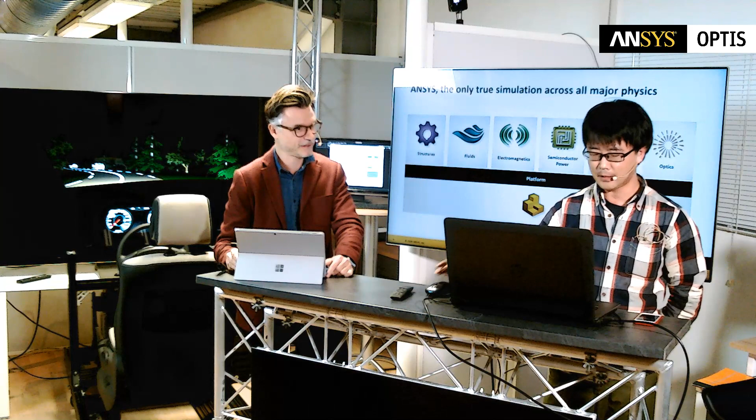So today, smart headlamp. First, Shohei, what is a smart headlamp? The smart headlamp is the adaptive driving beam, but at the same time, it has the sensors inside, LiDAR sensor, camera sensors. This is what we call smart headlamp. Okay, and this is the trend. Yeah, it's a coming trend. Okay, so I think this is the introduction of your next slide. Yep, the technology trend.

So today's technology trend is having more and more sensors for ADAS technologies and the future autonomous vehicle. And for the lighting, the ADB, adaptive driving beam, the technology trend is matrix beam or pixel lighting, or some may call digital lighting. The idea of a smart headlamp is having them together, having LiDAR sensor, camera sensor inside the headlamp. So the headlamp will be an all-in-one product, and for the headlamp suppliers, that will be additional value.

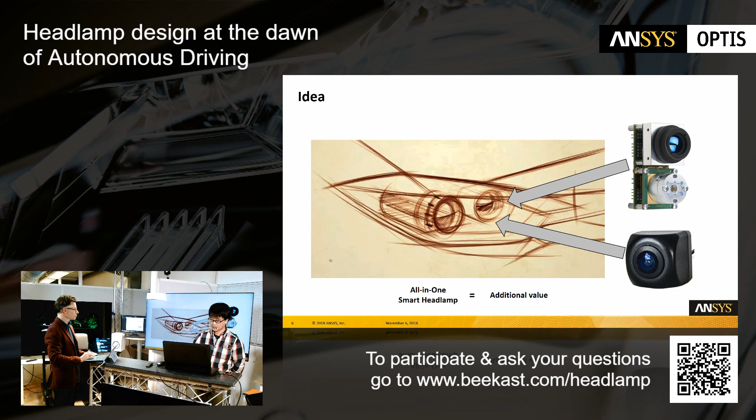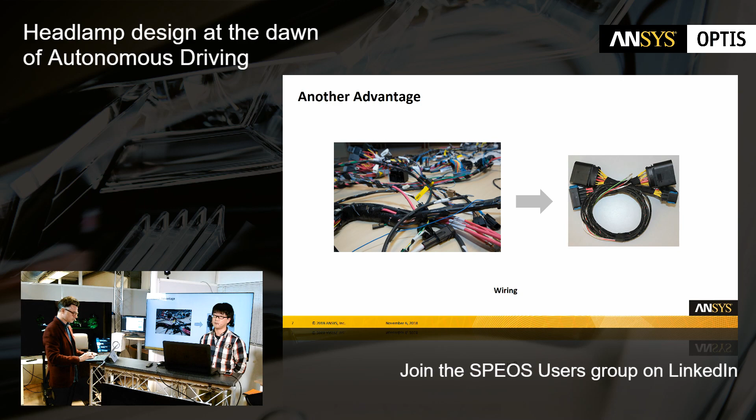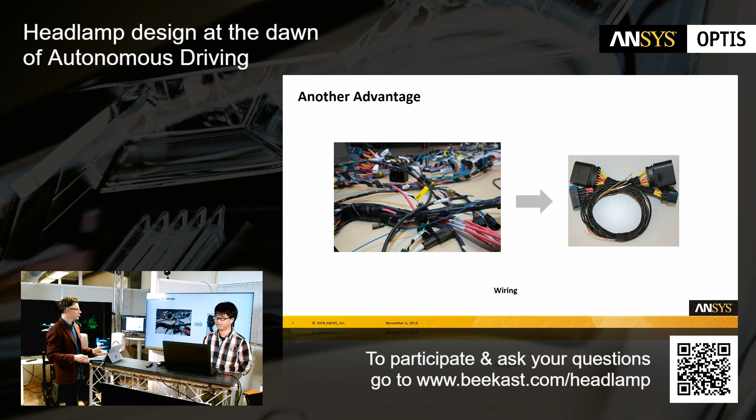And another advantage is to simplify the wiring. Currently, headlamp and sensors are separated, so the wiring harness is going to different places. But if everything is integrated inside the headlamp, there is only one connection to the lamp, so the wiring will be simpler. So the benefit of integrating sensors is first to simplify the wiring harness. That's for the OEM, the car maker. Yes. And for the supplier, it's to add value to the lamp.

Okay, I think it's time to have your feedback from the poll in Beekast. So how many projects do you have for 2018 and 2019? For this year, between 1 and 3 for 40% of you. And for the coming year, 2019, between 1 and 3 and more than 3. Yeah, the number of projects is increasing, the coming year is going to be busy. So that means everybody has a project next year.

Well, from now on, let me introduce what can be possible thanks to our solution. So first, I'm going to demonstrate one of our products, SPEOS, regarding the lighting design, sensor specification and sensor layout. And after that, I will switch to another product, VR Experience, to explain the virtual lighting evaluation. So let's begin with SPEOS.

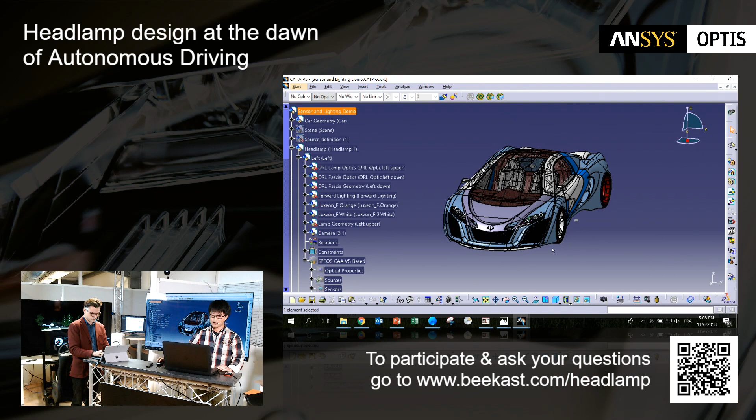Here I've got a car, and here is the headlamp. As you can see, this is not the same as the conventional headlamp. Here I have the lighting module, forward lighting, LiDAR sensor, and camera sensor here. And the lighting signature here: this is a daytime running lamp and turn indicator at the same time. Okay, so let's begin with lighting design.

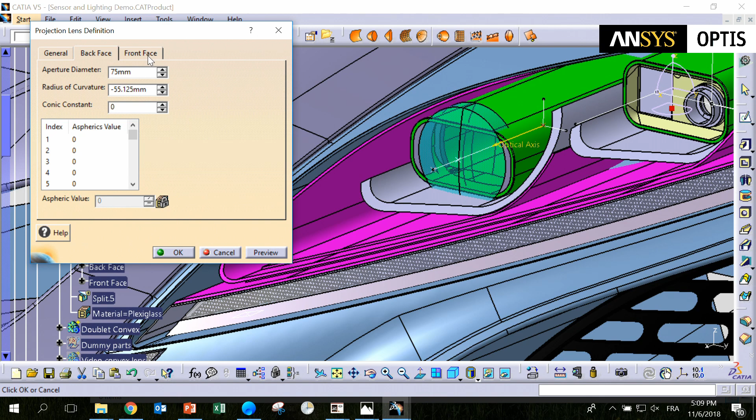For example, this lens is made with this feature developed by OPTIS. The name of this module is OPD, optical part design. Here you can see several icons to create the complex optical geometry. Let's see the interface. For example, this one is projection lens. The definition is your focal point, optical axis, focal length, and some other geometric parameters. Then the geometry is automatically created. It's quite simple and fast.

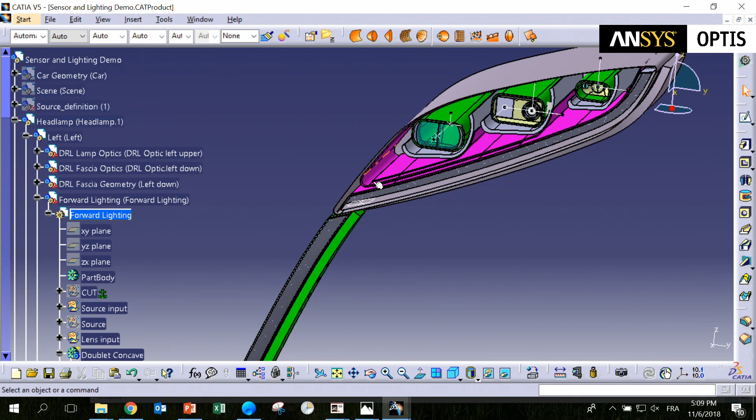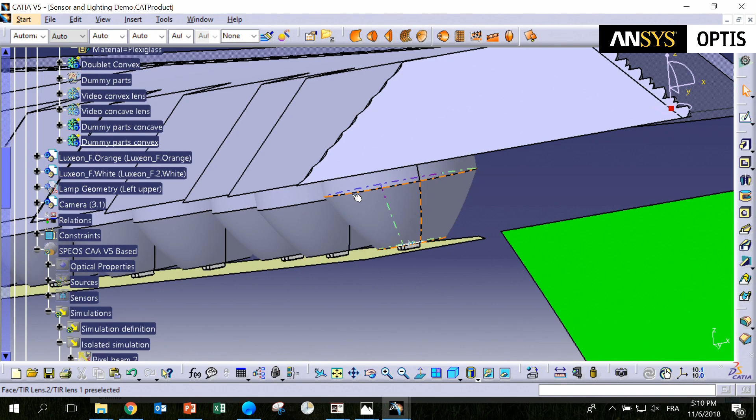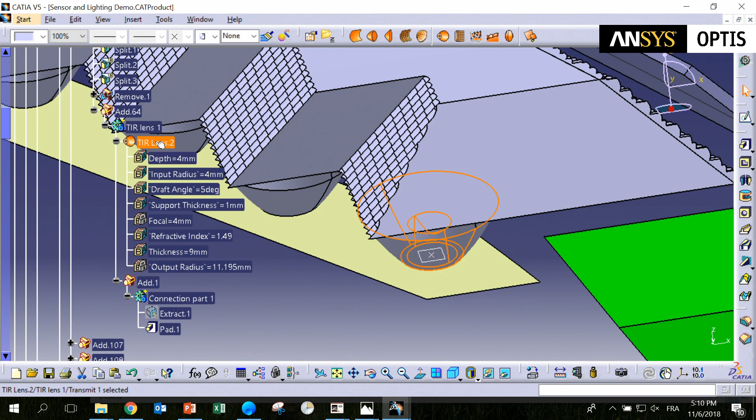Another example is this lighting signature. Let's hide the car geometry and some other geometry. As you can see, this lighting signature, some may call it a light blade, is made with a light inlet, a reflection on the back, and an output face here. And as I showed for the projection lens, a similar interface is available for every feature. For example, this one is a light inlet, with several geometric parameters. Then the geometry is automatically created like this.

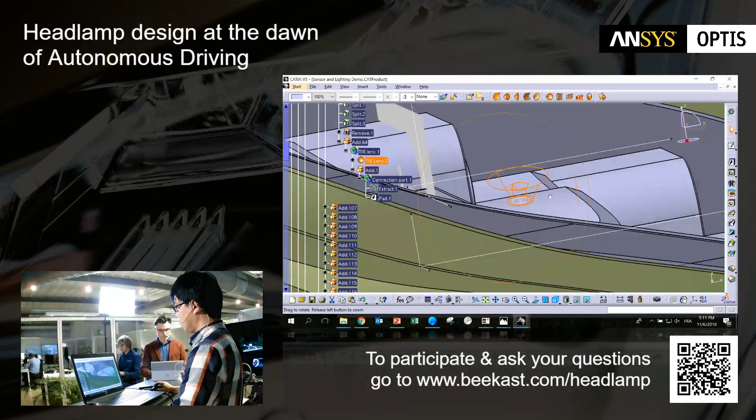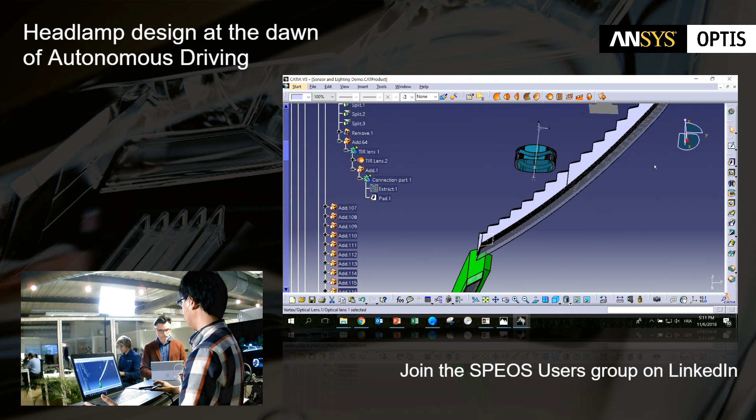And this back face and this front output face as well. And imagine that if you have to create these kinds of small prisms, hundreds of prisms along the styling manually, it takes hours or a day or even days. But thanks to Speos OPD, it can be finished in minutes. So you can make several iterations using different parameters to investigate the performance, appearance.

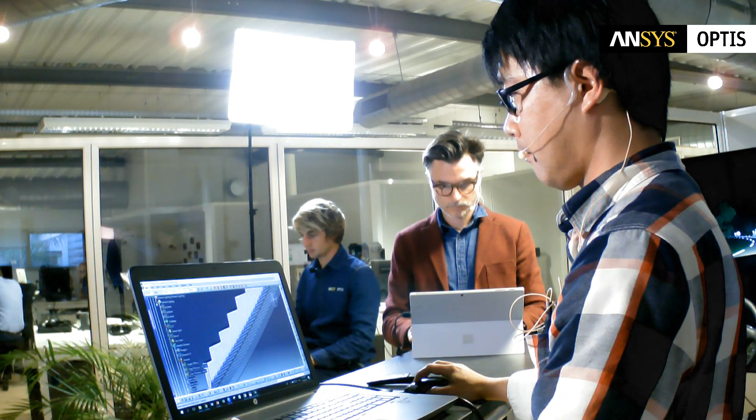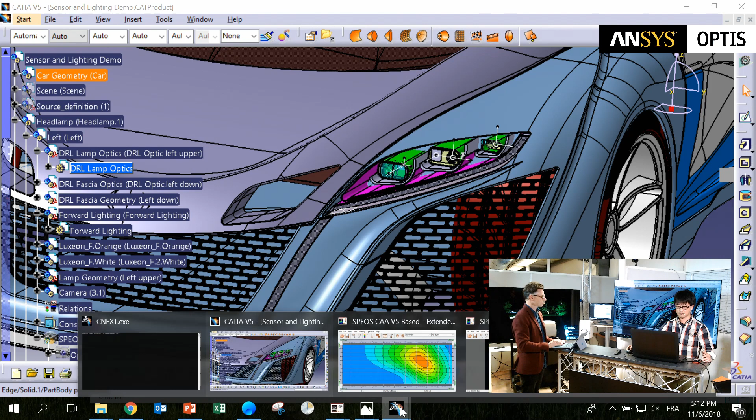I said performance or appearance. Of course, you can evaluate these kinds of things in Speos. For example, regulation. This is the beam pattern from this lighting signature. And this is a part of a classic optical simulation.

And of course, you have to check the appearance, how it looks like with your design. So we have the physics-based rendering. This is one of our strong points.

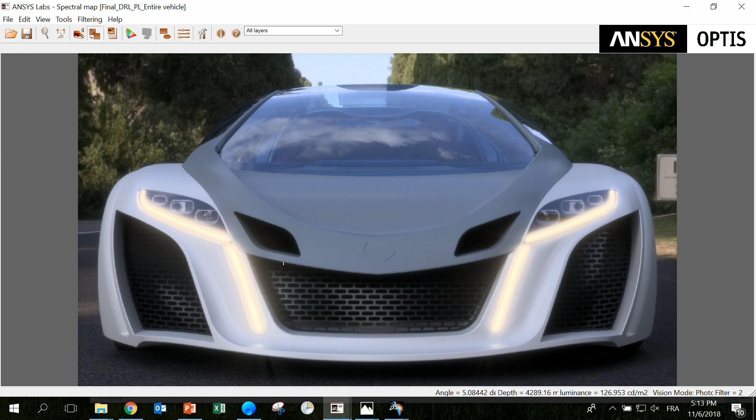Yeah. Before we continue, Shoei, as we have a question dedicated to this part, I just want to close the question we had right before regarding the challenges. So the challenges for you, a lot of physical prototypes. Yes, a lot of physical prototypes, but we also have regulation, test certification, time to market as well.

Great. So that's regulations. That's interesting because you have just demonstrated that we are able to check the regulation in virtual. So it's numerical certification of the headlamp, the performance of the headlamp in virtual. So we are able to deal with these challenges.

I wanted just to jump to the next question while Shoei is showing the images, the rendering of the light appearance, the light signature. So the next question is: are you satisfied with the lighting appearance of the result displayed by your actual software?

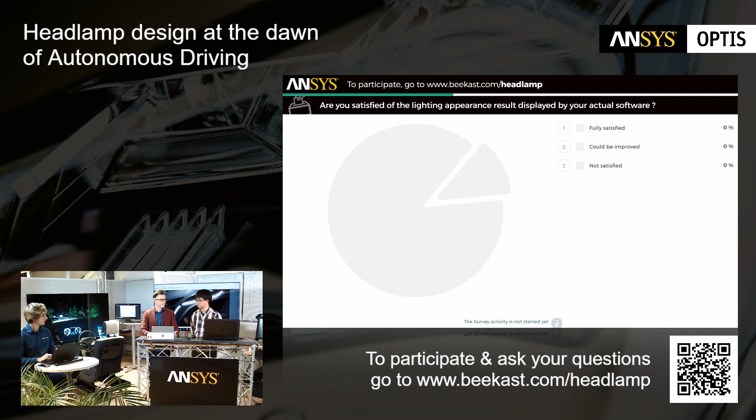Okay. So this is another rendering image in the dark condition, daytime running lamp or position lamp. Or turn indicator. And depending on your needs, you can change the point of view, viewing direction, and run another simulation to check the appearance from a different point of view. Okay. So this is the quick introduction about the lighting design and evaluation.

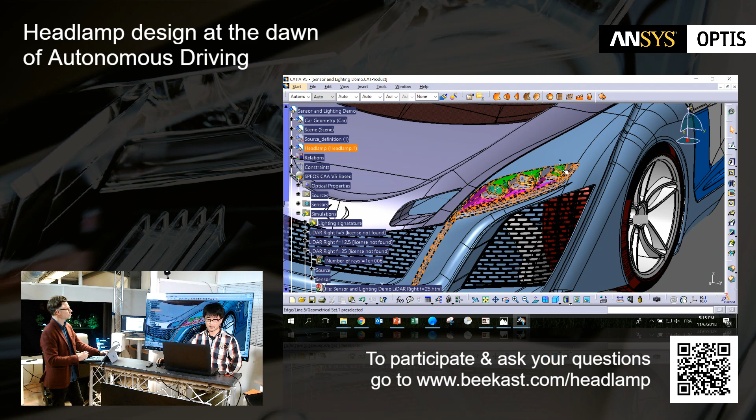So let's switch to the sensors. So before starting, let's see the scene used in the simulation. This is something we just made up, having several vehicles and pedestrians. It's quite a simple environment. This is simply made in CAD, so you can create whatever you want inside the CAD, and you can consider it in your simulation.

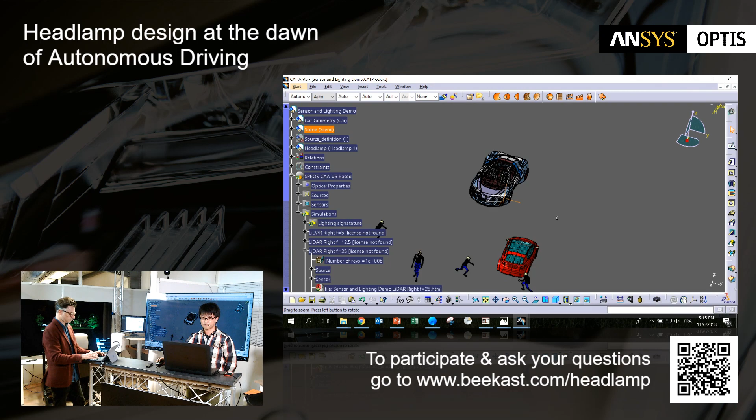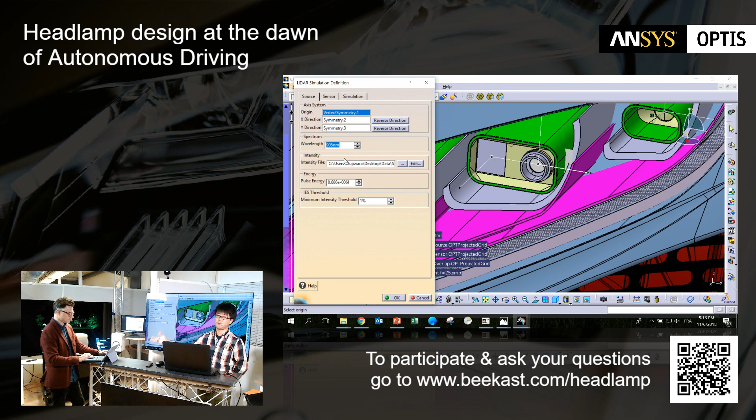So let's begin with LiDAR. As I told you, here I have a LiDAR module. And in Speos, we have developed the function to simulate LiDAR. This is a LiDAR simulation module. And this is the interface of our LiDAR simulation tool. You can define the source here. You simply define the axis system and spectrum and intensity, beam intensity pattern.

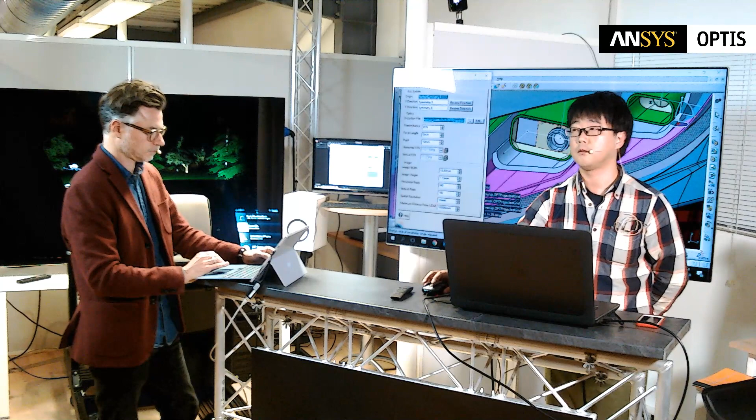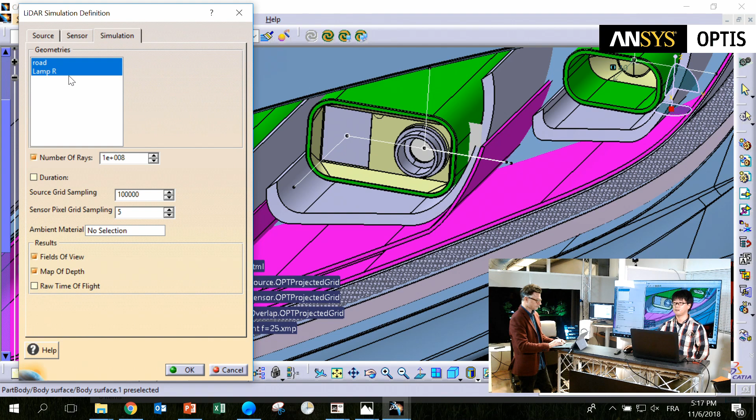And for the receiver, the axis system and some optical information like distortion and image dimension. And you can define the simulation using a defined source, sensor, and user-defined geometries around. So that means you can consider the bezel, for example, this one, and also the objects in the scene, like pedestrians or other vehicles.

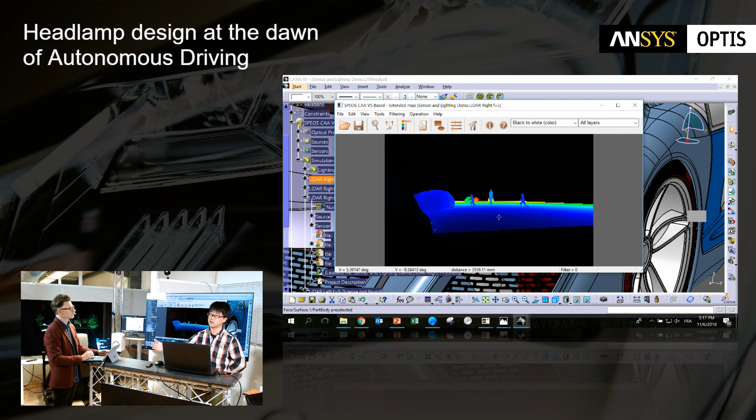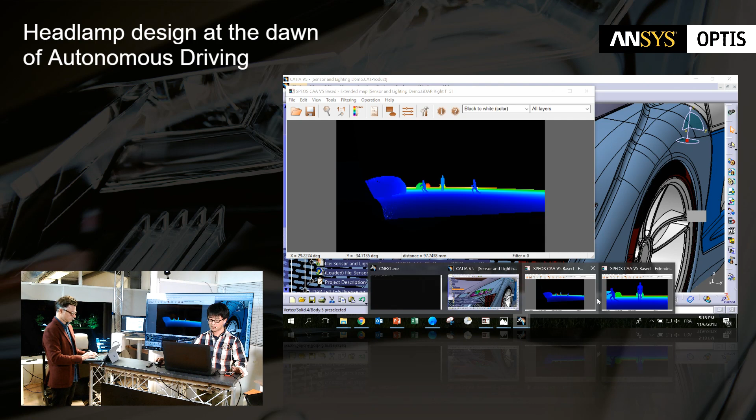So this one is a simulation result with a shorter focal length. And this one is a simulation result with a longer focal length. So you can check how much this LiDAR module can detect, how wide.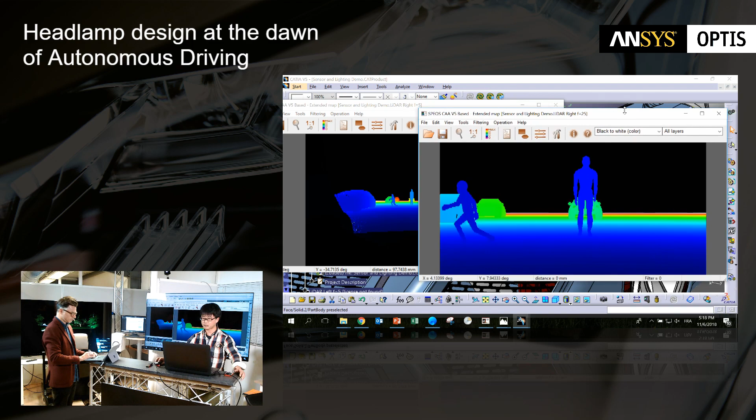So to test a different configuration, just define several different LiDAR simulations, simply changing some parameter here, for example, the focal length. If you want to change the image dimension, you can modify it here, or resolution. So you can test a lot of different configurations of your LiDAR module in virtual. Okay.

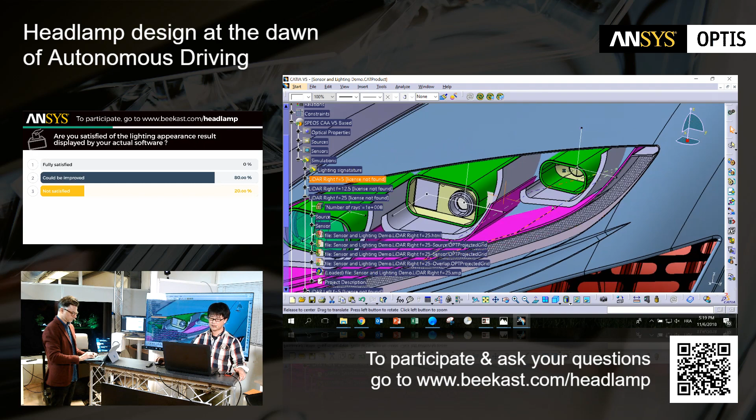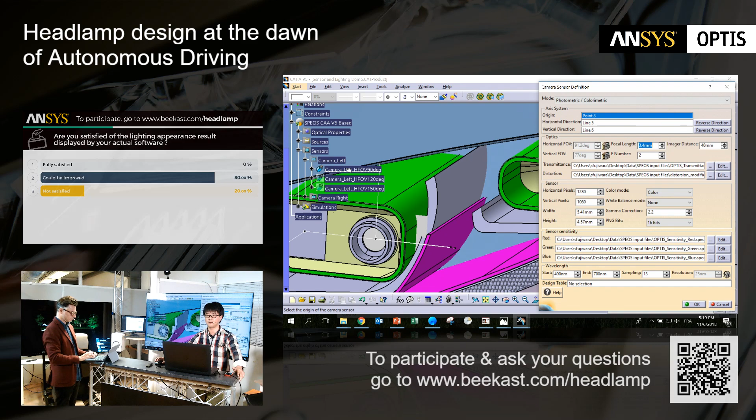So next, let's see the camera. We have the camera sensor inside Speos. The definition is quite similar to the LiDAR receiver. This is the interface. So the position and direction, axis system of the camera, and optical information: transmittance, distortion, and sensor dimension.

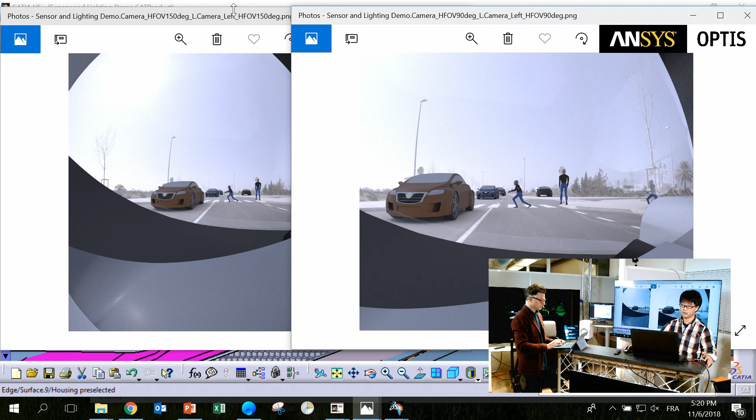So you can use this camera sensor in your simulation, considering the geometries around. So you can do a similar thing as a simulation, for example, with a different field of view. Obviously, these two images are different. The right one has a narrower field of view, and the left one is wider.

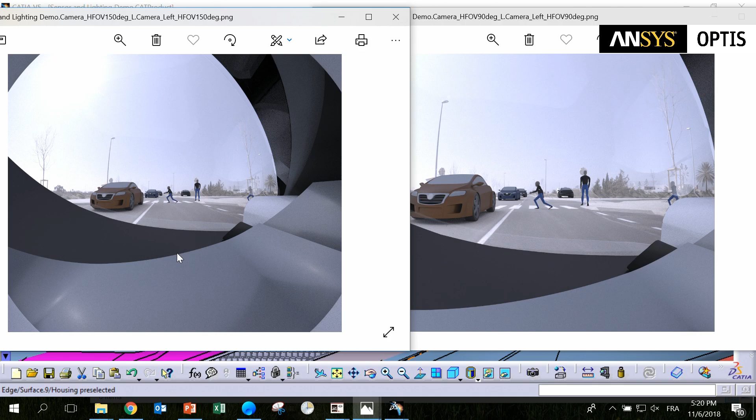But let's say you want to have wider images with this camera. If you put the camera with a wider field of view inside the headlamp, you have a lot of objects inside the headlamp bezel. Most of the image is blocked by the bezel. So thanks to this simulation result, having a wider field of view camera is not a good idea, I think. So you can do this kind of test quite quickly.

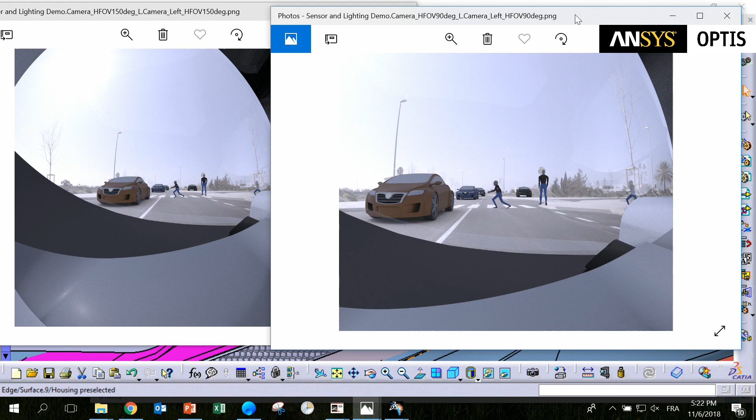Another interesting point is the reflection on the outer lens of the headlamp. Here I have some reflection here, and here too. Sometimes, for some reasons, you may have a different option of outer lens shape. The outer lens shape is part of the class A surface coming from the design studio. So the design studio may have different styling ideas, and from the engineering side, for some reason, the shape of the outer lens may have to change. So for every possibility, you can check the effect of the outer lens. For example, in this model, I have two different outer lenses.

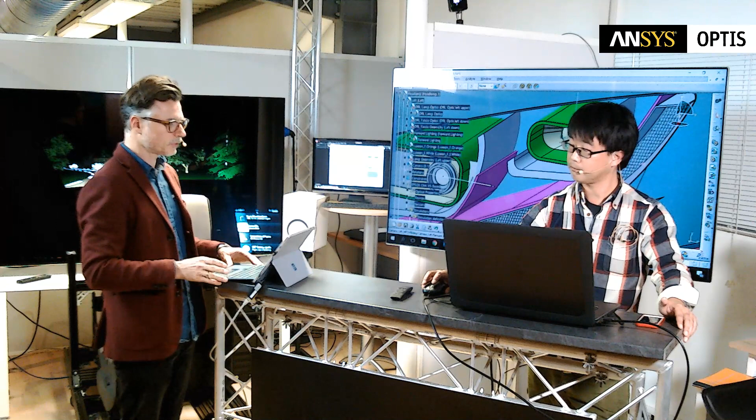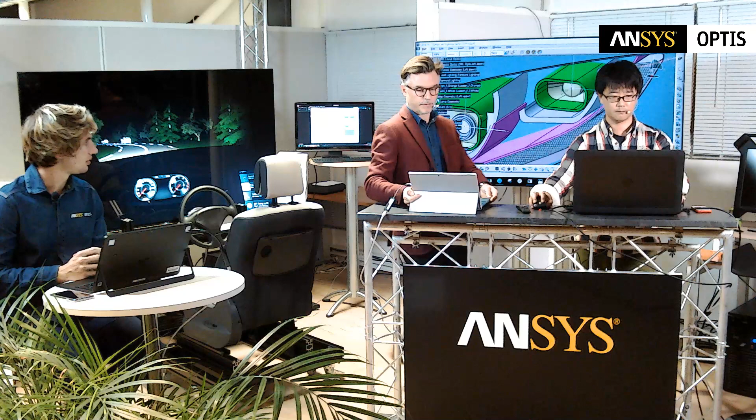Maybe just before you continue, we can review the last question: are you satisfied with the lighting appearance result displayed by your actual software? I think it's important to notice that people are not satisfied, and they need an improvement regarding the images. 80% of you say that it could be improved, and 20% are not satisfied.

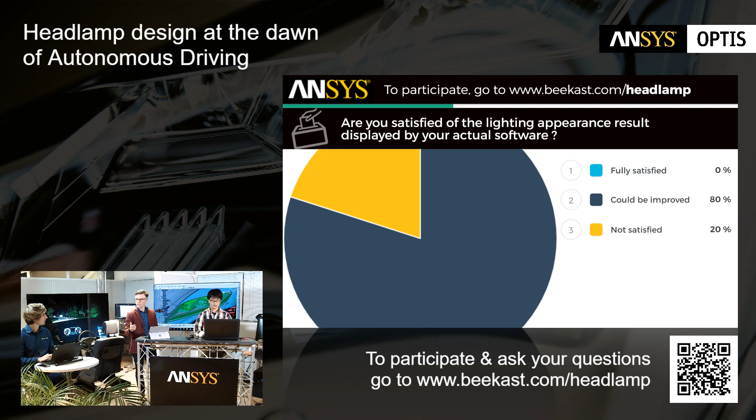And it's something that is key in our software: with the human vision module, you are able to experience the light appearance of the light signature, the daytime running light, like in reality. So that's really important, and this is one of our strong points. We will launch the next question and continue with the explanation. The next question is: which sensor technologies are you considering to integrate in the future? Smart lighting.

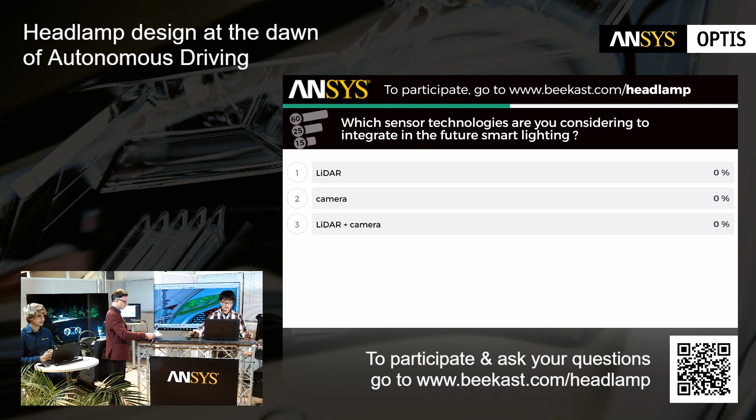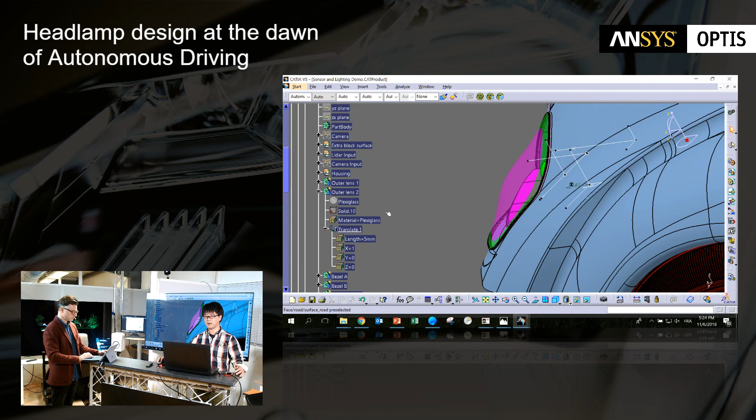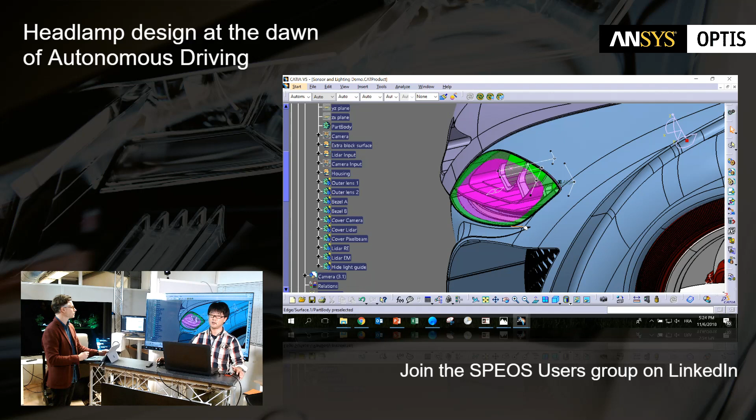Thank you. So, the different outer lenses: I have outer lens 1 and 2. This green one is outer lens 1, and this pink one is outer lens 2. I think it's easier from this point of view. This pink one, outer lens 2, is more curved at the center. And I ran the simulation using these two different outer lenses. So let's see the difference.

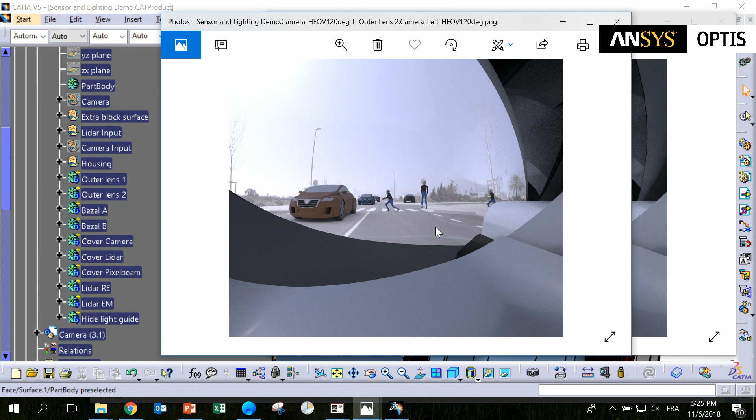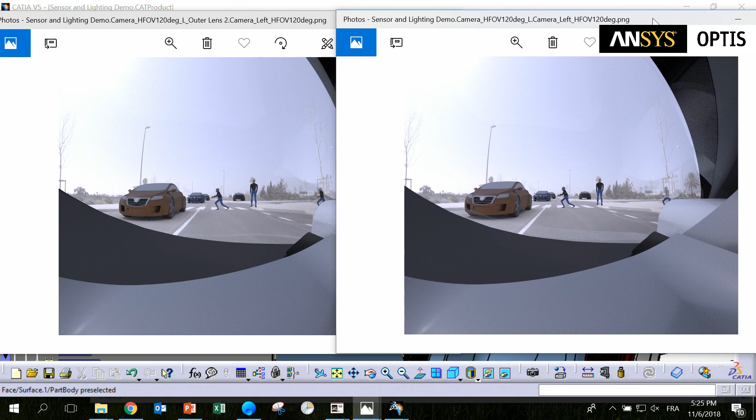Sorry, not this one. Okay. So first, this result is made with outer lens 1. As you can see, a reflection here, here, and here. Next, this one is made with outer lens 2. Obviously, you cannot see the reflection at the bottom here. And the amount of reflection at the top is slightly different.

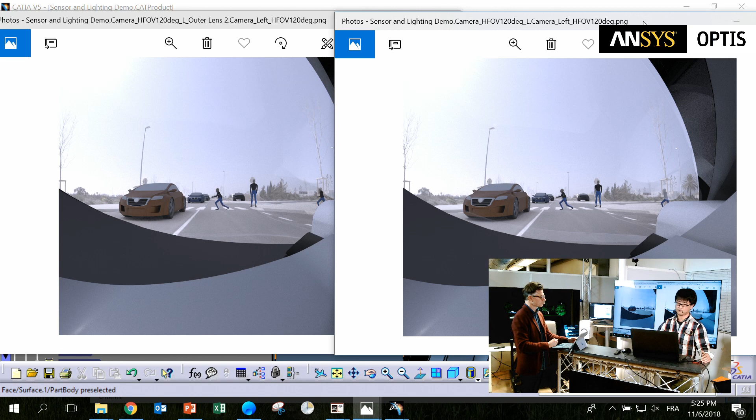So this kind of difference may happen due to the shape of the outer lens, and you can detect it virtually without making a physical prototype. Especially at the beginning of development, the styling changes a lot. So for every option, you can check the possibility of issues. Okay.

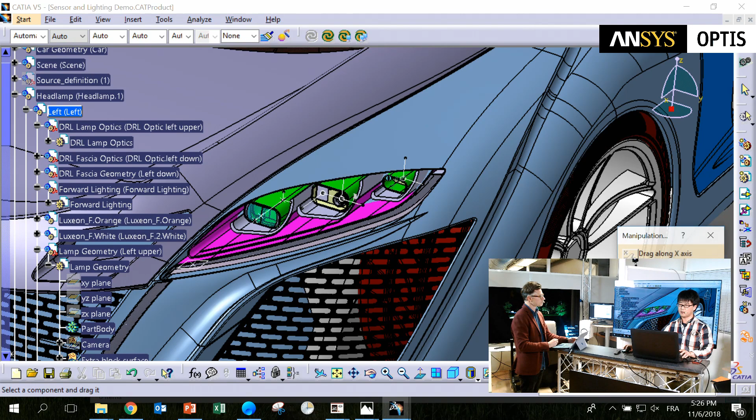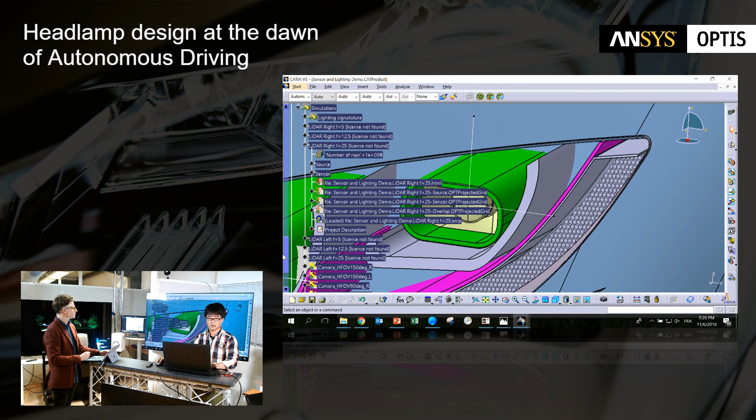Another interesting point could be the styling. For example, you may want to put this camera deeper, or close to the outer lens. Usually, from a styling point of view, deeper is better. You want to hide the element. Exactly. But what happens if you put the camera deeper inside? You can imagine that part of the field of view will be blocked by this green bezel. And you can easily simulate how it will be.

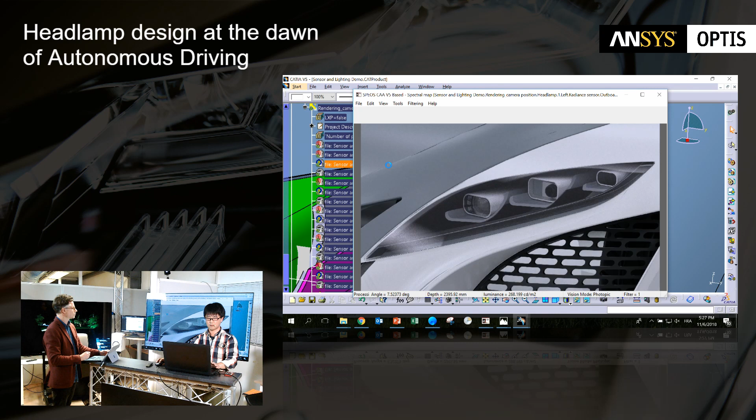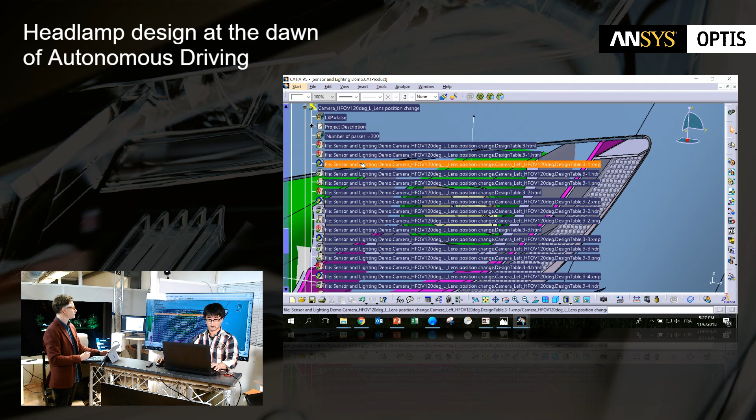And this is the appearance. You can see the camera here, or for example, the camera here, deeper. The difference is quite clear. Sorry. But at the same time, the view from the camera, the field of view, is quite different. So you can compare the results and define the best configuration.

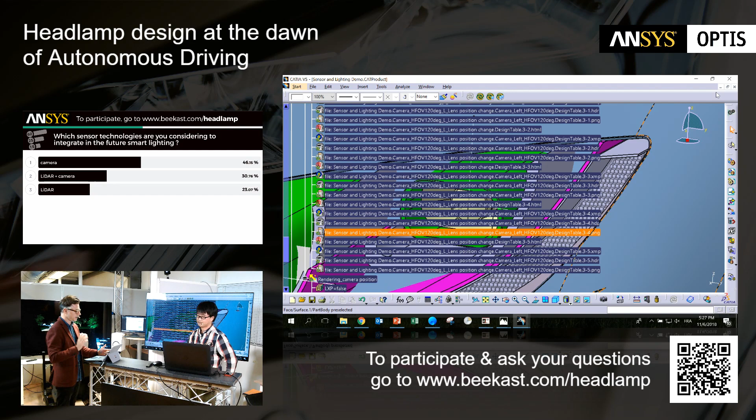So here, the value is that you are able to define the specification of the sensor and define the layout. And you are able to test the camera in lighting conditions, the light of the headlamp, but also the lighting conditions of oncoming vehicles. And you test the outer lens too. You test the shape here, but you are also able to test different materials for the outer lens. Of course, yes.

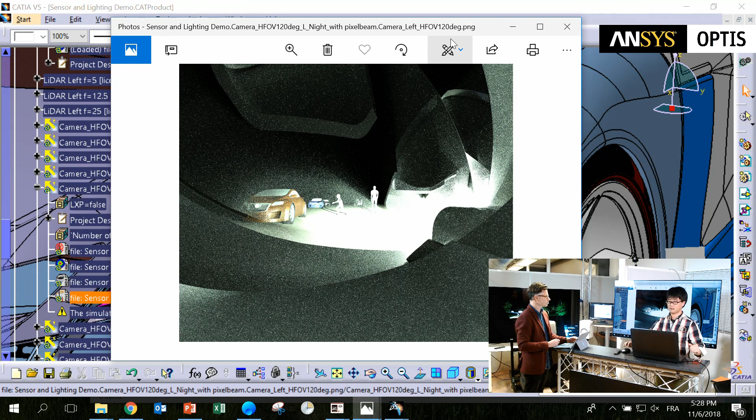Okay. So this one is the example with a lighting condition. The headlight is on, so you can see some reflection of my headlamp on the outer lens. Okay. I think we will go on to the VR experience. So let's see the VR experience. This is the solution for real-time lighting evaluation.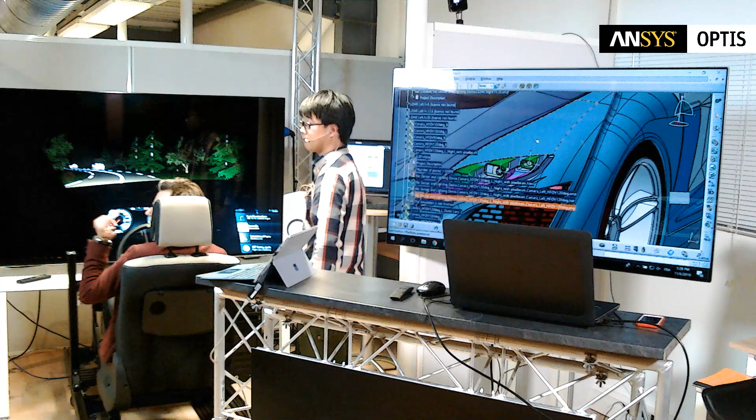You can launch here if you want to make a wrap up on the question. So yeah, for the last question, which sensor technology are you considering to integrate in the future smart lighting? 42% of you say that you would like the camera, and 35% LiDAR plus camera, so the combo, and LiDAR in third position for 21% of you. So some of them are considering the LiDAR alone. LiDAR, yeah, that's interesting. Only 21%, but the first one is camera and the combo.

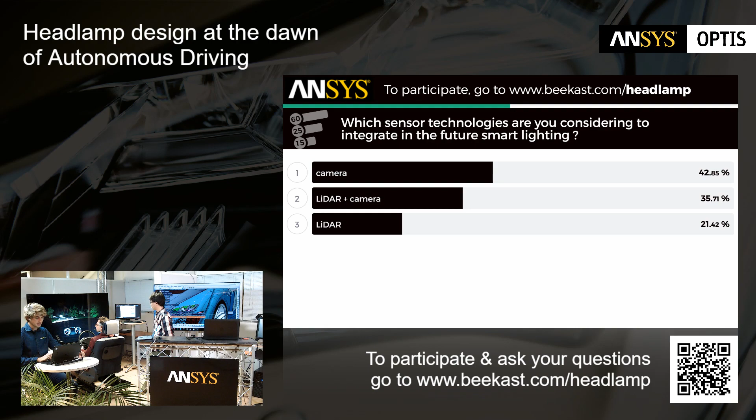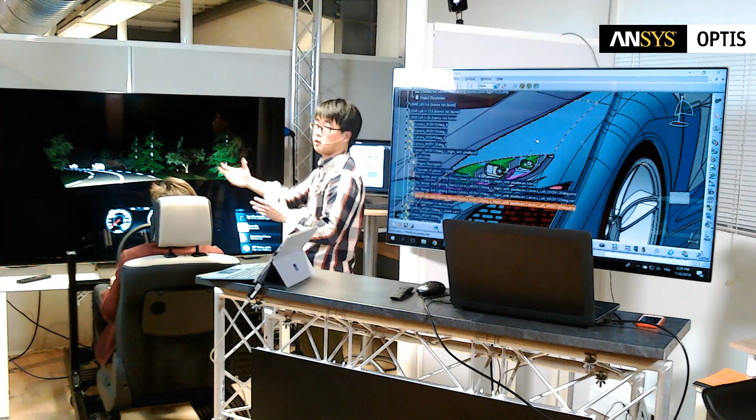Okay, thank you for your activities. I will launch the last one. So the last one is regarding this solution, so I'll let you present it first. Okay, so here, as you can see, there is a road and my car and some other cars. This scene can be created by the user. And in this example, it's a simple, little bit twisty country road with some vehicles.

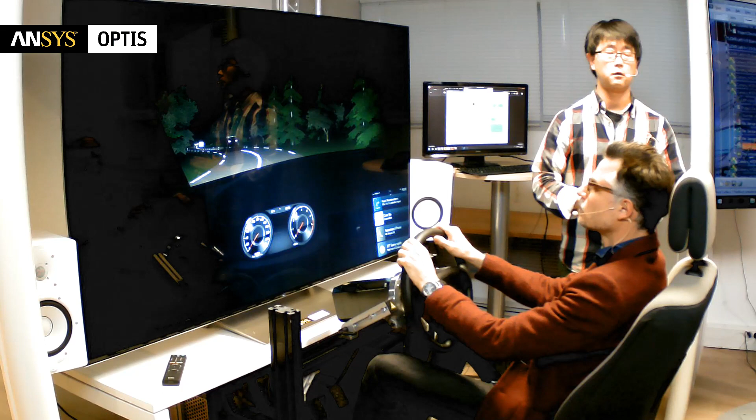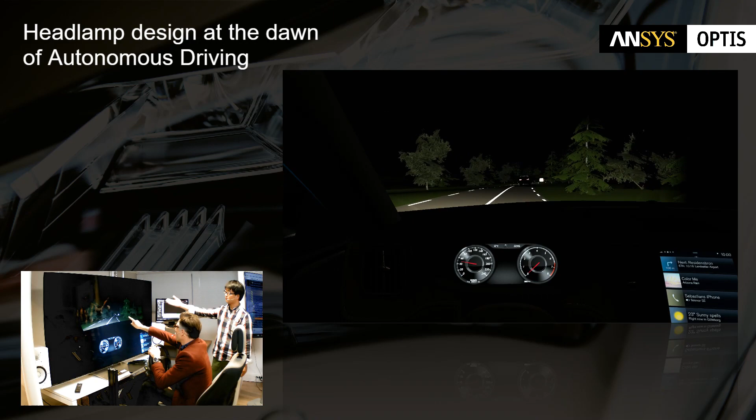And what you will see here is the pixel beam controlled by a user-defined control law. So you will see some mask on preceding vehicle and oncoming vehicle. So let's see. Yeah, we see the mask here. So you don't glare the oncoming vehicles, and also follow the vehicles in front. So this is the typical behavior of pixel beam. And depending on the setting in your lighting control law, you can modify the size of mask.

And what are the straight lines? The bars on the road are distance warning. Currently, this car is braking in order to turn right, so the distance between this car and your car is getting shorter. Then you have distance warning, and currently this warning sign is indicated in a negative way. The bar is dark. This is negative. But of course, the positive is possible. But in both ways, you need to check, for example, how much contrast you need to make it as obvious, as clear as possible.

So you can test several different contrast levels. This one is quite low contrast. It's almost invisible. In dark gray and dark with higher contrast. And how many bars you want to have. This kind of manipulation, modification can be done by user-defined control law. So let's continue.

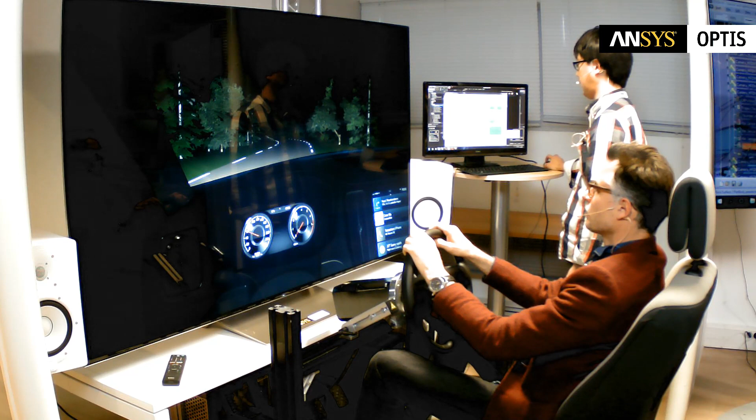And as you can see here, in this scene, we don't have a center line. So this dot is indicating the virtual center line. And you can do a similar thing, positive, negative, or how many dots you want to have. Okay, that's nice. So this kind of evaluation test can be done in a virtual real-time environment.

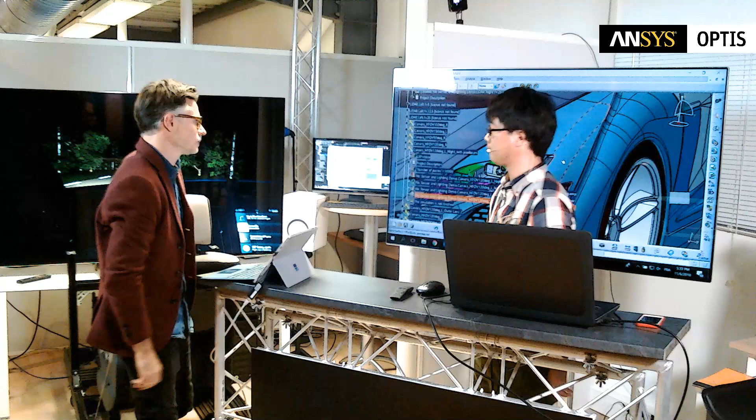So yeah, I think we'll finish with the last question, and I think it will be related to what you are going to announce, because the last question: would you be interested in having a physics-based camera in a virtual driving simulation platform? Of course, a majority of you answer yes. It's quite obvious you need this kind of physics-based camera in a driving simulation like this. Yes. So today we don't have it. Here we are just working on the lighting performances and on the control law.

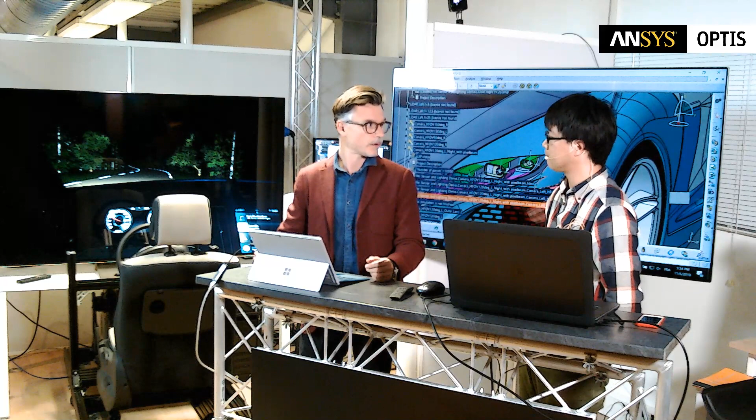But for the near future, VRX, VR Experience 2019, you will have a physics-based camera. Yeah, it is coming. So that's good news. Yeah, exactly. That's good news for all the projects you have in the coming years. In 2019, they will be able to work on this technology.

Okay, so just the wrap up. The value of our VR Experience is you work on the lighting performance, you work on the control law, and thanks to VR Experience Headlamp, you assess the lighting performances and the control law in real time, in real conditions, whenever you want. You don't spend nights on the test track, as you know. Whenever, wherever. So that's the benefits. Replace the costly and time-consuming night tests. Yeah, exactly. Okay, thank you.

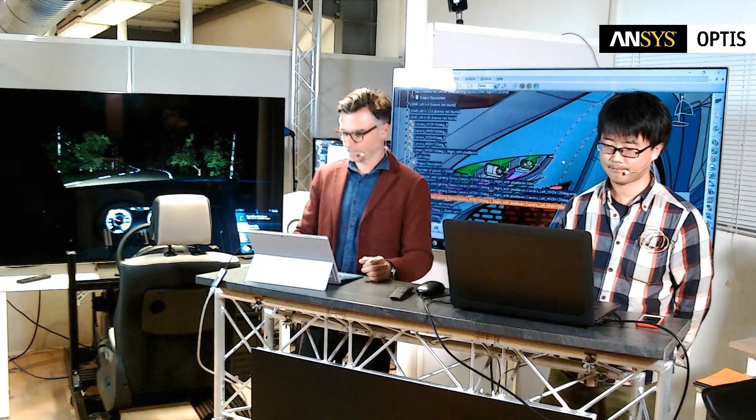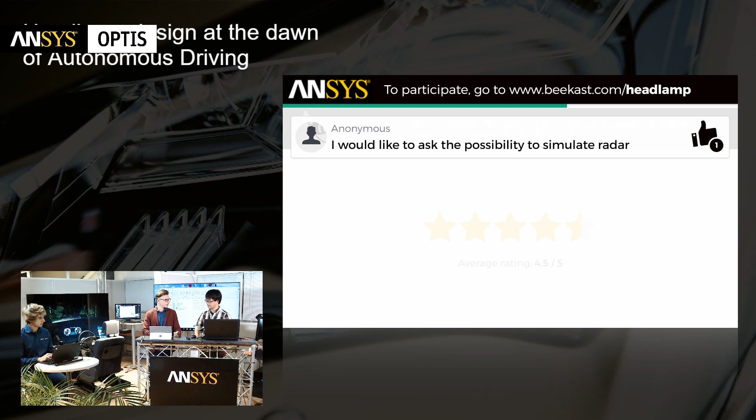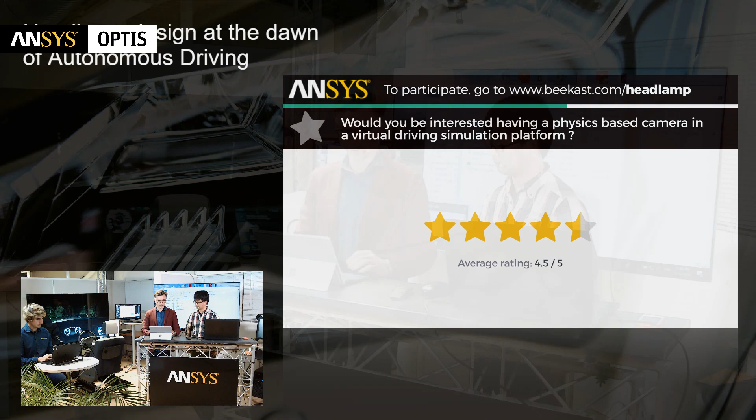I would like to ask the possibility to simulate radar. Radar simulation. For the moment, it is not available in both platforms, I think. But of course, it is planned in the development plan. Well, with the link we have with ANSYS, I think we will be able to simulate the radar very, very soon, no? I think so. So it's coming for next year, for sure.